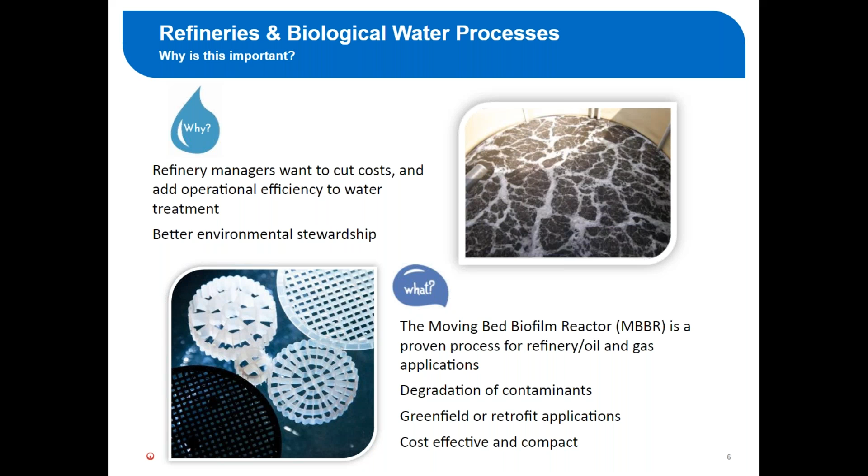Moving Bed Biofilm Reactors, so MBBR. It's a proven process for refineries and oil and gas applications. It degrades common contaminants from refineries. It can be used in greenfield or brownfield applications, and it's very cost effective and compact.

So my overview for today: I'm going to talk about biological treatment as a whole. What is it? How does it work? Then I'm going to talk specifically about the MBBR process, and then more specifically about refinery applications for the MBBR process, and finally some case studies and a conclusion.

So biological treatment, how does it work? Biological wastewater treatment uses living microorganisms to destroy or transform pollutants. So that means these little creatures use human trash, or pollutants as we would call them, contaminants, as their treasure. They use them for food, for energy, and also the energy necessary for their reproduction.

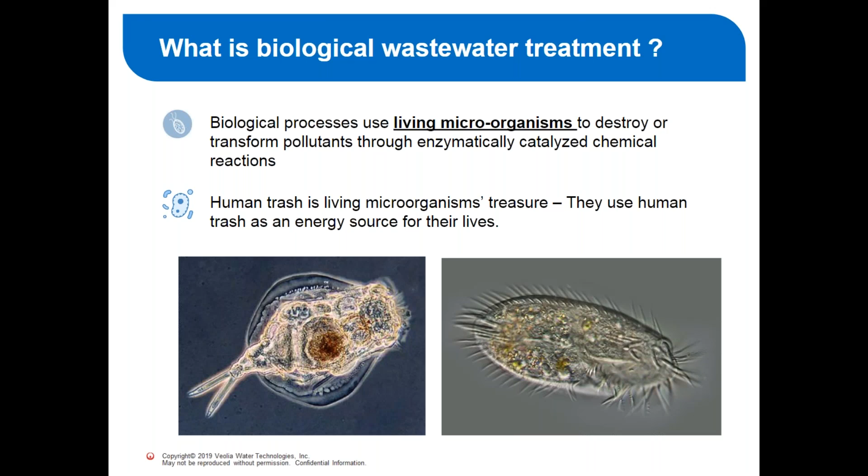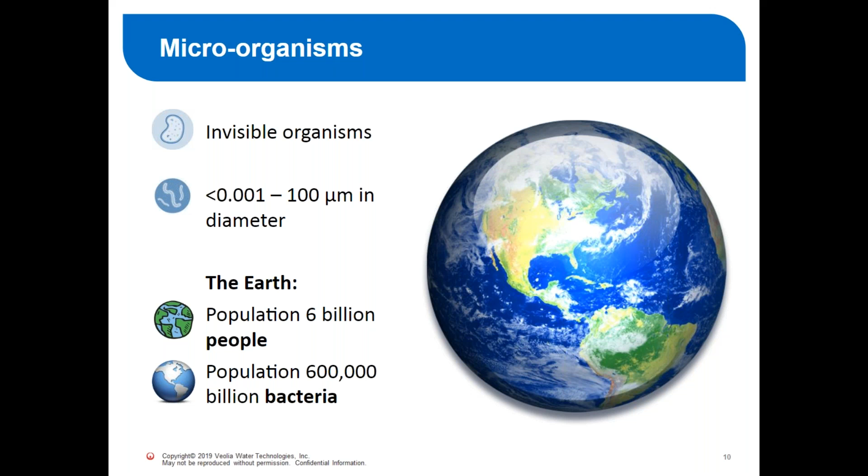Microorganisms are invisible because they're so small. You can see they're 0.001 to 100 microns in diameter. To give you an idea, bacteria have been around a lot longer than we have as a race, and they are also significantly more populous. They have about 100,000 times more population than human beings on the planet.

So why do we care? What would we use biological treatment for? One is the removal of ammonia. Ammonia is a nitrogen source that can cause eutrophication in the receiving stream or water body. Ammonia also increases chlorine demand. So for instance, if you're using chlorine to disinfect, you have to remove the ammonia before the chlorine becomes an effective disinfectant. It also increases the oxygen demand for a similar chemical process, since it has to be oxidized first. And it is also directly toxic in high concentrations.

Organic carbon and cyanide can both be toxic, and they also increase the oxygen demand. So if water with high COD, we call it organic carbon, is put into a receiving stream, it would deplete the oxygen supply, and then the fish die, and anything that needs oxygen within the stream would die.

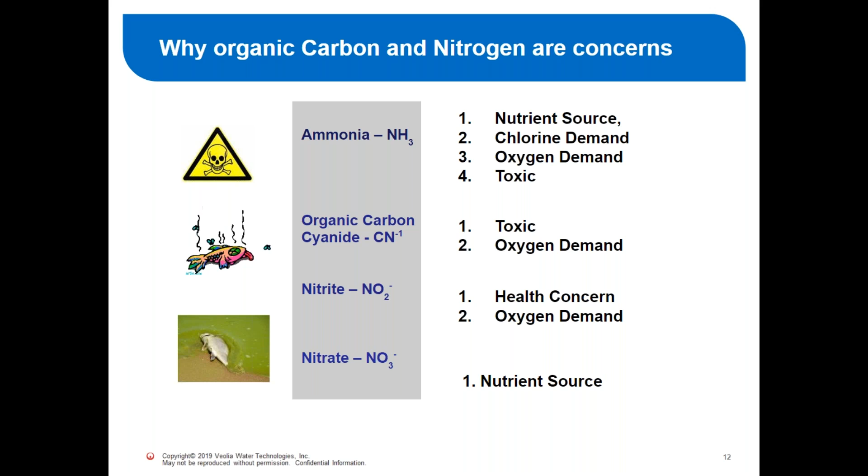Nitrite also has an oxygen demand, a little bit less than ammonia, but still there, and it is a direct health concern for fish even at relatively low concentrations. And nitrate is also a nutrient source that can cause the growth of algae in the receiving stream.

So this is a little diagram of what is kind of happening. There's a happy bacteria in the middle. From the top comes a source of organic carbon into the bacteria, and the bacteria uses it in two ways. The first way is biosynthesis, so it reproduces and has additional biomass that can be wasted, and then it respires for energy, and similar to us, produces carbon dioxide, or if it is using nitrate, it will release N2.

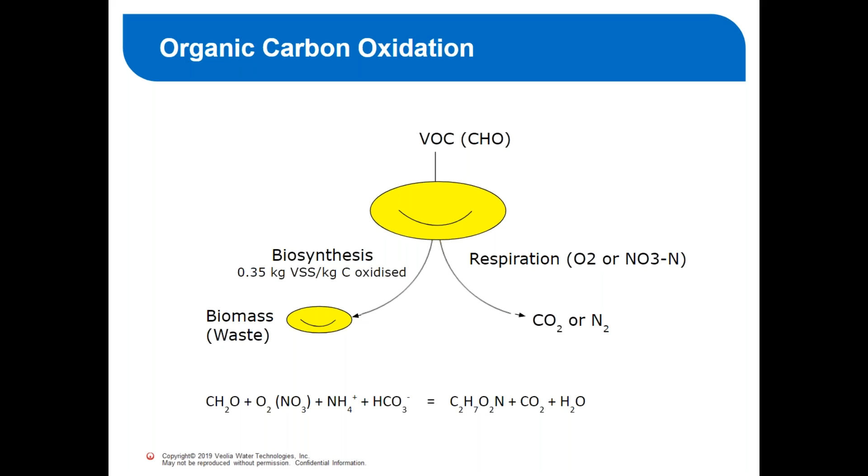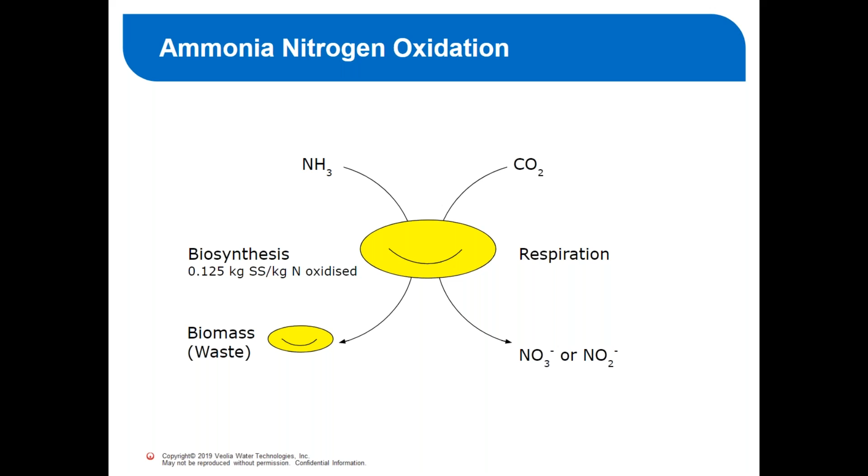For a different kind of bug that removes ammonia, it's an entirely different species, and there's a variety of species that do both of those processes. But this kind of bacteria takes up ammonia and a source of inorganic carbon, usually CO2, and it has the same needs, so to speak. It has the biosynthesis and the respiration, but because it's using ammonia as its energy source, the oxidized form of ammonia becomes NO2 or NO3, depending on which stage of nitrogen is taken up.

So this is an overview of nitrogen removal if you have an ammonia limit in your effluent, or if you're just trying to remove all of the nitrogen to lower TDS, or for another reason. The first stage is called nitrification. On the bottom left of the screen, there is ammonia, and it is oxidized first to nitrite and then finally to nitrate, which is the most oxidized state of nitrogen. This is an aerobic process, and you can see the bubbles going up in it.

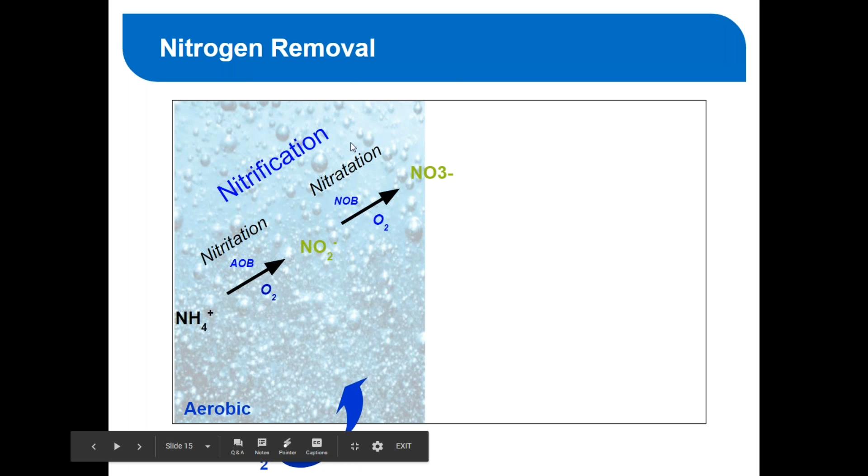And then the next step is called denitrification, where it takes the nitrate and deoxidizes it. It takes an oxygen off, so it becomes nitrite, and then finally N2 gas. The N2 gas bubbles out of the system and is removed, so there'd be no nitrogen left. This is an anoxic process, so COD is a needed food source for that step.

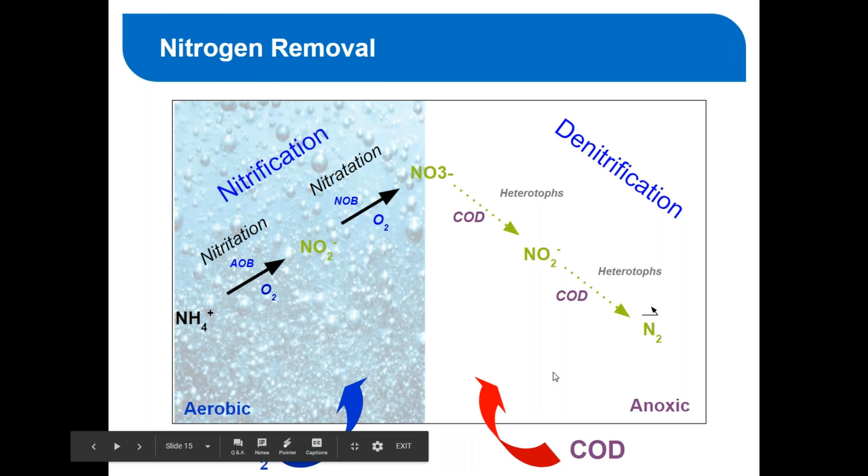So that's the biological processes, and now we'll talk about the MBBR specifically. MBBR, as I mentioned, stands for Moving Bed Biofilm Reactor. It was invented by a company called AnoxKaldnes, that Veolia acquired a number of years ago.

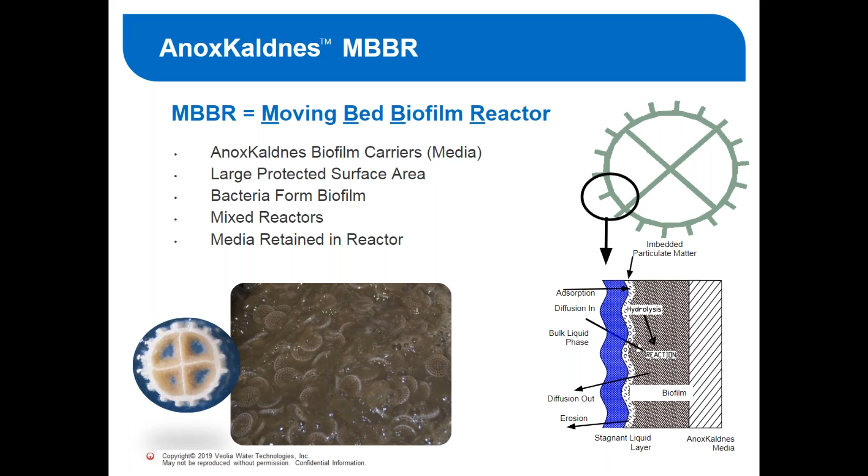It uses these pieces of what we call media, or biomedia, or carriers, as sort of stages to have biofilm form. We'll talk about what that means later. It's a mixed reactor, and the media is retained within the reactor, so it's never wasted.

So the characteristics of an MBBR: AnoxKaldnes, that Veolia acquired, was the first one, the inventor of the MBBR who started this company. He now still works for Veolia as a consultant. It biologically treats carbon, nitrate, ammonia, using the biomass on the moving carrier.

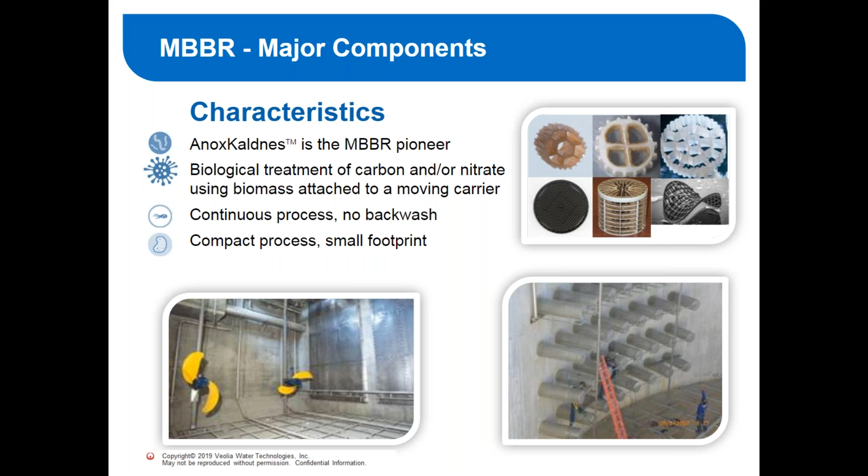It's a continuous process, just a flow-through tank. There's no backwashing, so it's pretty simple, and it's also compact with a small footprint. So it's a super simple system.

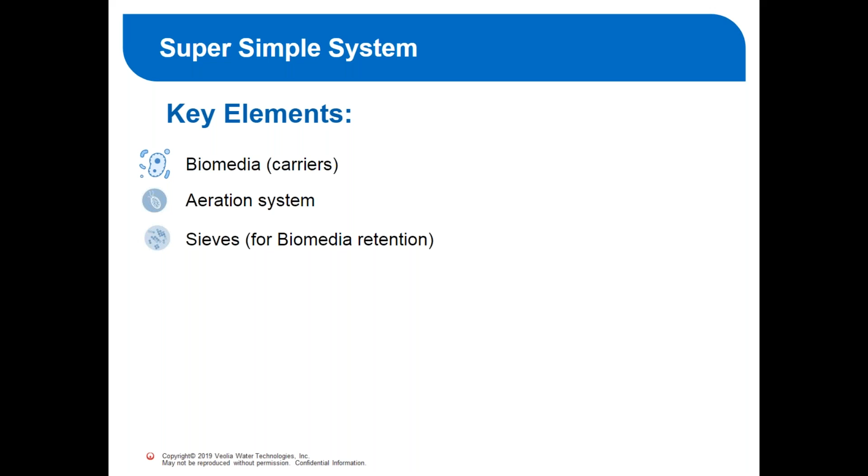There's really only three elements. The first is the biomedia, as I mentioned, or media or carriers. These are little plastic pieces that look like wagon wheels, and there are literally millions of them in the tank as stages for biofilm growth.

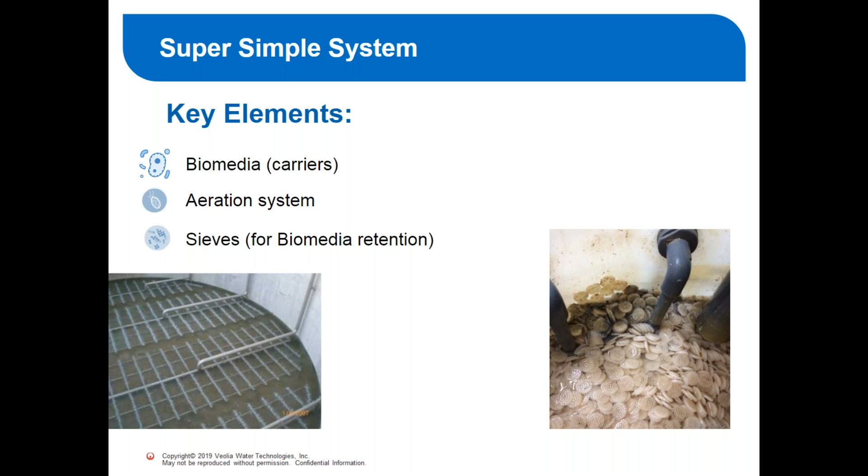There's an aeration system, or if it's an anoxic process, as in denitrification, there's a mixer. So the pieces of media have to be continuously mixed. That's why it's called a moving bed, because the bed is moving, by either of these components. If it's an aerated process, we would have aeration grids on the bottom to both provide oxygen and keep the media moving.

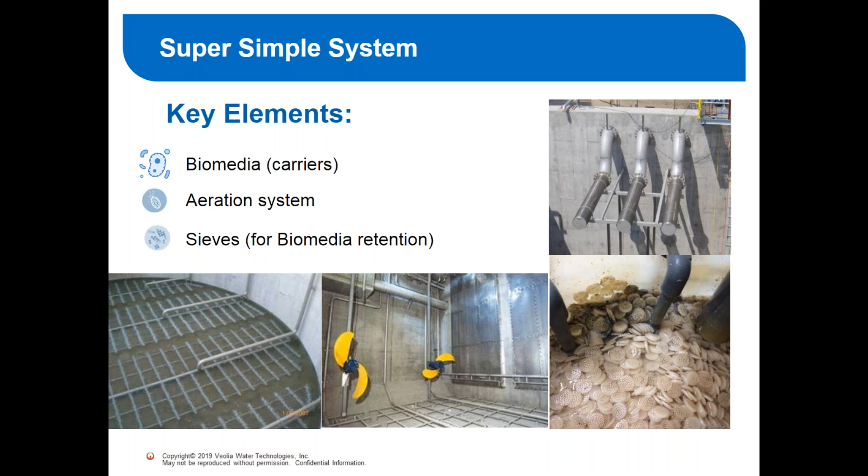And then the third component is the sieve, which is just protecting the media from escaping the tank. It's on the effluent of the reactor.

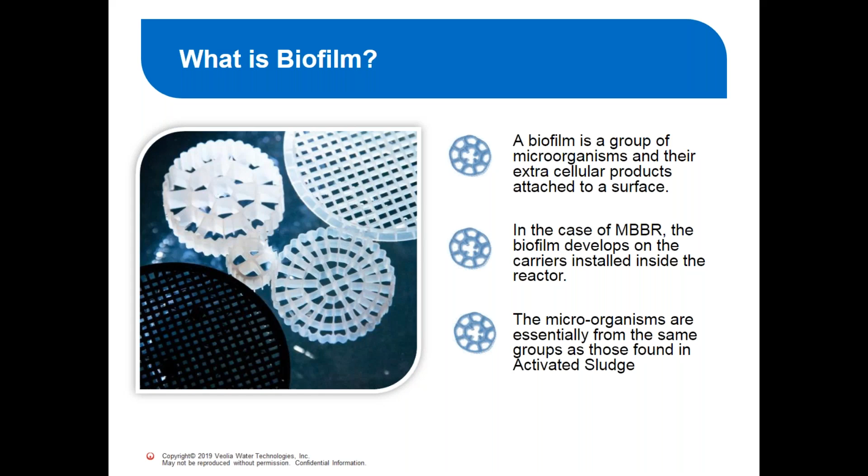So what is a biofilm? A biofilm is a group of microorganisms and their extracellular products attached to a surface. One of our experts likes to say that if you don't brush your teeth for a long time, you have a biofilm develop on your teeth. So if you're wondering, it's just sort of slimy and it can actually do some damage.

As the biofilm develops and gets thicker, they're making more biomass, and it's sticking more to the media. So the underside of the biofilm, in the thicker portions, isn't getting the oxygen and nutrients it needs. This decreases the efficiency of the treatment process because not all of the cells have access to the material they need or are able to remove the contaminants in the water.

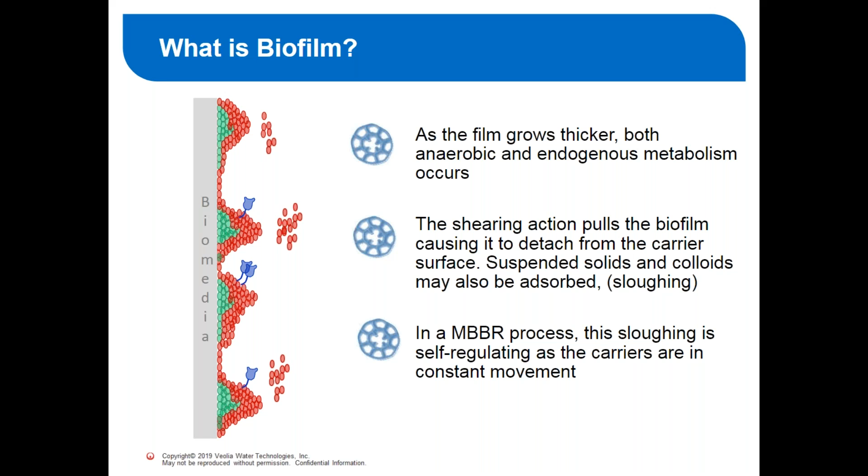But the MBBR, because the media is constantly mixed, has a sloughing action. It's self-regulating because the media is moving, so this biofilm is naturally knocked off as the pieces run into each other or into the wall and move around. The biofilm is released, which keeps it thin enough so all of the nutrients and food can get into the most active biofilm.

It can be separated into several stages. If you need to do ammonia removal or even nitrogen removal, you can have one tank be a COD removal tank, a different tank be an ammonia removal tank, and so on. It easily separates them into stages, and they don't have competing inhibitions because of competition from other kinds of bugs.

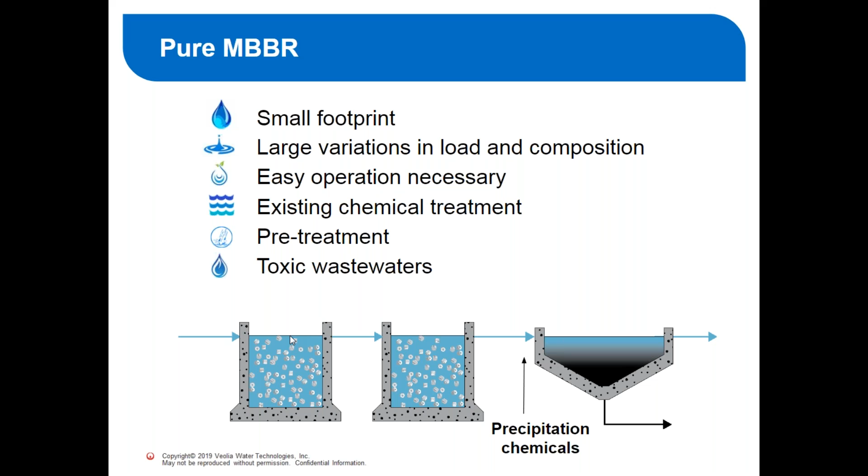So the MBBR can handle a variety of loads, or variation in loads. It's easy to operate - there's no recycle of sludge, which is very common in activated sludge systems. It can use the same chemical treatment as activated sludge, the same pre-treatment. It can be used as pre-treatment to an activated sludge system, and it can handle toxic wastewaters much better than activated sludge.

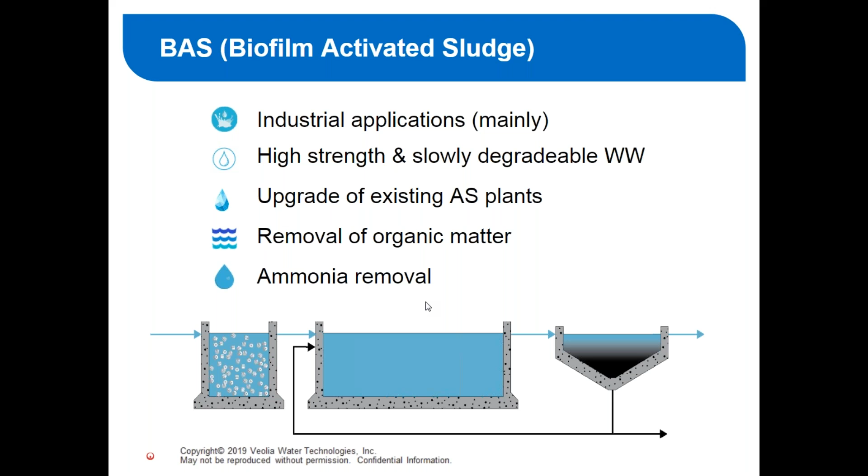So the MBBR can be put in front of the BAS system in order to upgrade an existing activated sludge system. It can be used to remove organic matter to help the activated sludge system concentrate on the ammonia removal.

There are over 1,000 MBBRs built by Veolia or AnoxKaldnes in the world. We just passed that threshold last year, and we have many in oil and gas - over 30 installations, probably about 30 installations in the oil and gas industry.

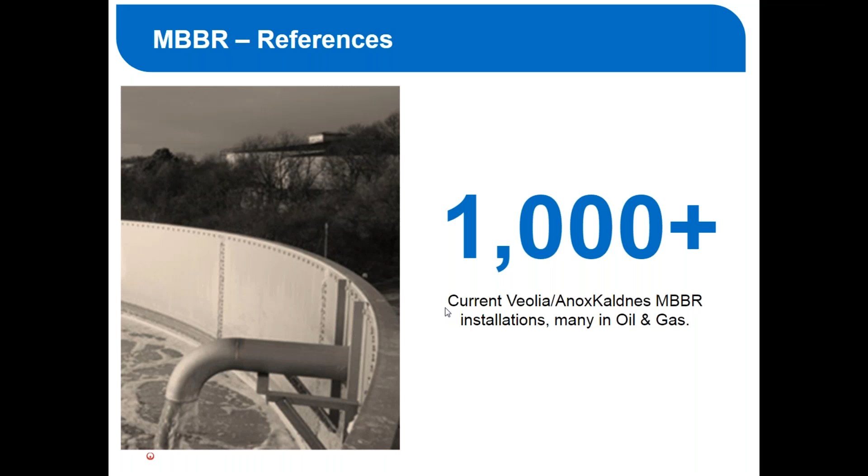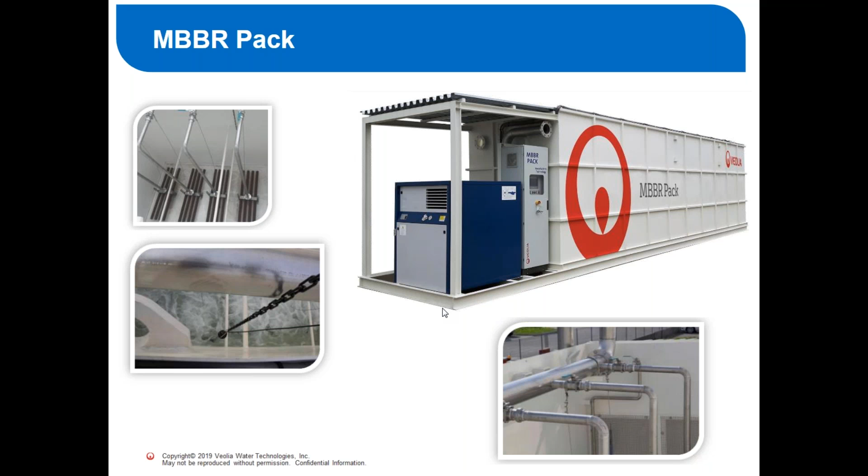So where would we put an MBBR system in a refinery? It can be put in a greenfield, just if you're building a new facility. It can retrofit an existing facility or improve its capacity.

If you need just BOD removal or BOD and nitrogen removal, biological processes can remove selenium in the forms of selenate and selenite. It can treat the POTW wastewater if you're using that as your source water, or for sanitary wastewaters, MBBR can be used as well.

It's often used before discharging to the environment to treat the wastewater of a refinery. It can also be used in reuse scenarios to increase the efficiency of that process.

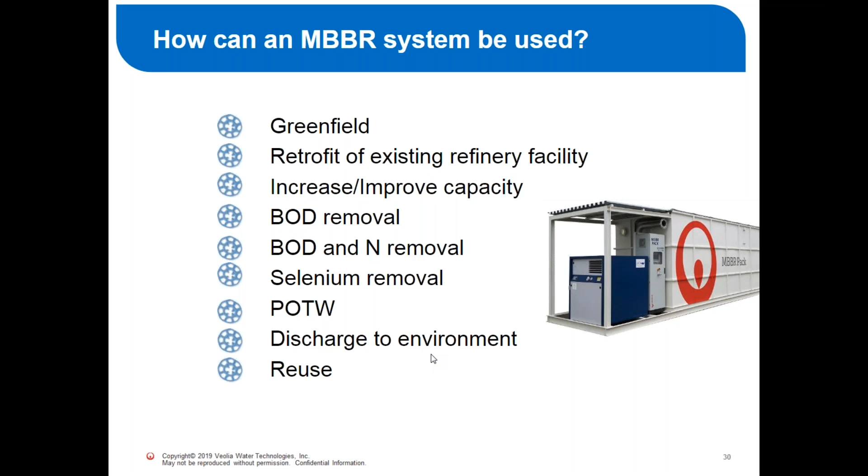Or you could make the activated sludge system what is called an IFAS, or integrated fixed film activated sludge, which means you have an activated sludge process and then you put these carriers, this biomedia, into the activated sludge process to help it remove either ammonia or more efficiently the COD.

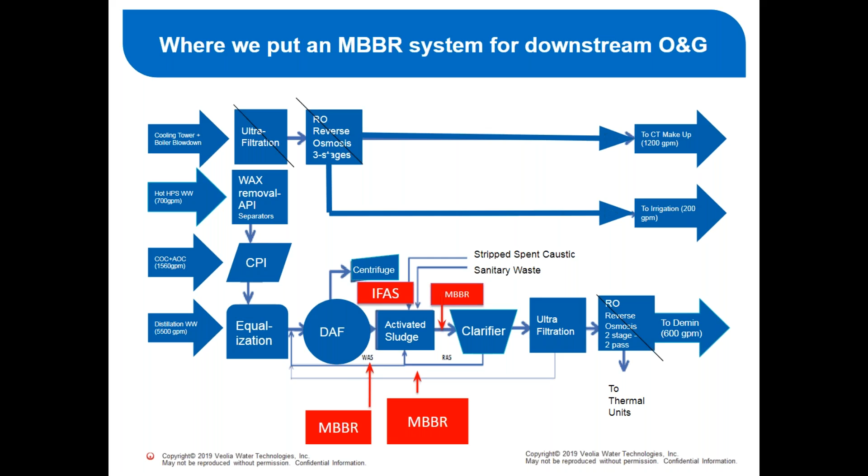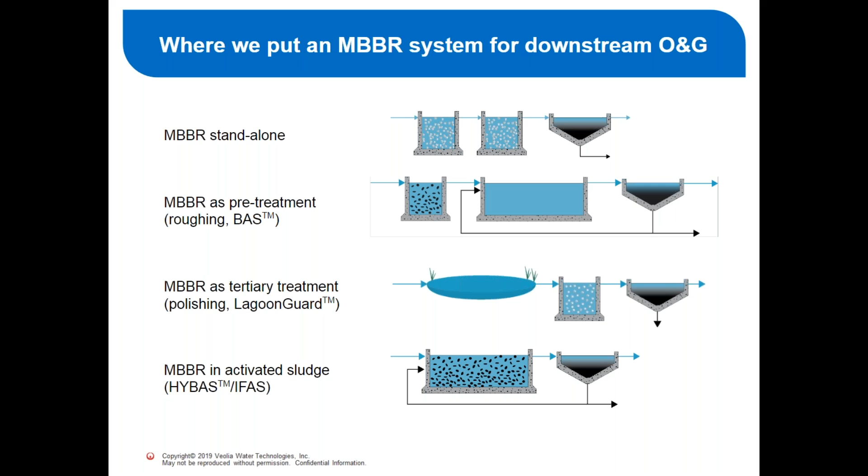So these are the different configurations for those options. The MBBR standalone, you can see as many stages as you want, each tank individually standing. Then the MBBR is sort of a pre-treatment to the activated sludge, a tertiary treatment to a lagoon, or MBBR in the activated sludge system for an IFAS.

So what are the key benefits for refineries? Probably the most attractive one is the low capex and opex for an MBBR. There's no solids recirculation with wasting, so that saves a lot of trouble for the operators especially, and it also improves the settling characteristics, which makes it just easier to operate.

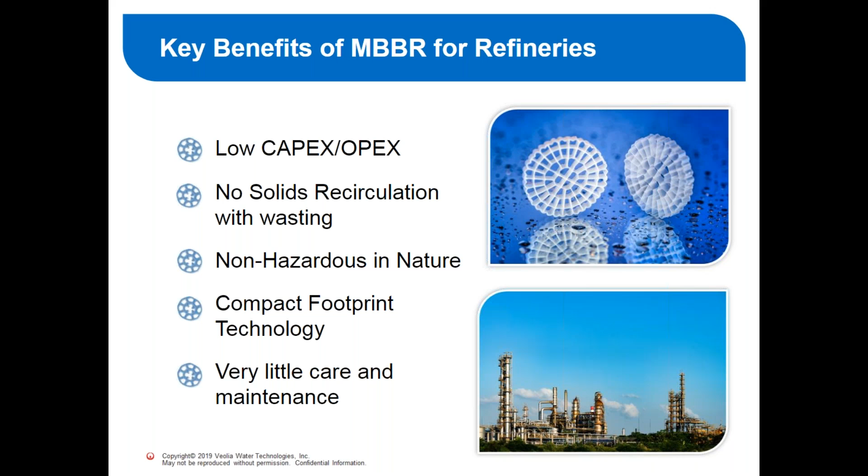It's non-hazardous in nature. We're basically just putting into a tank what the environment would have to do, so the environment doesn't have to do it. It's a compact footprint, and as I said, it's very easy to operate, so it needs little care and maintenance.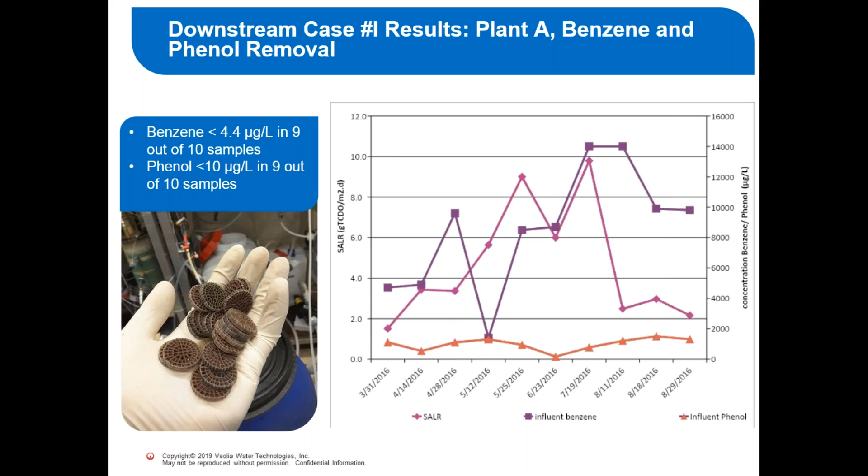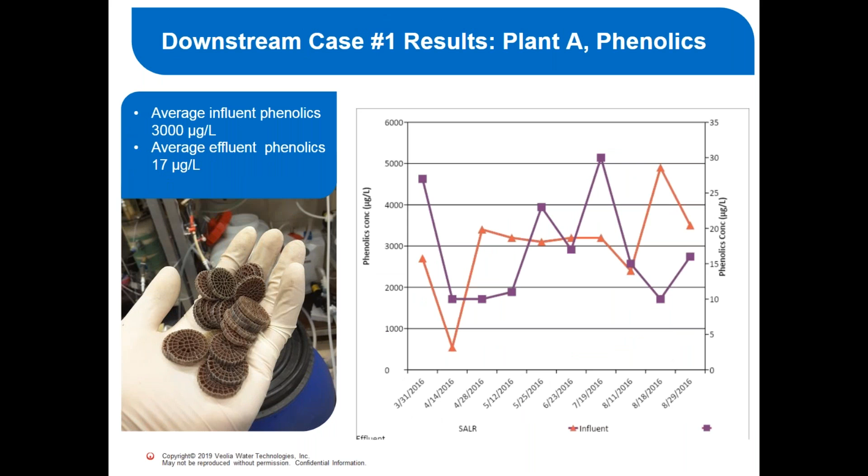The effluent phenols is on the right there, the scale is on the right, and the influent scale is on the left. I think the numbers are, this is a little bit easier to see. So the COD scale is on the left there, and the feed, as you can see, it's around 1,000, between 800 and 1,000. And then at the bottom, the R2 is the effluent of the MBBRs.

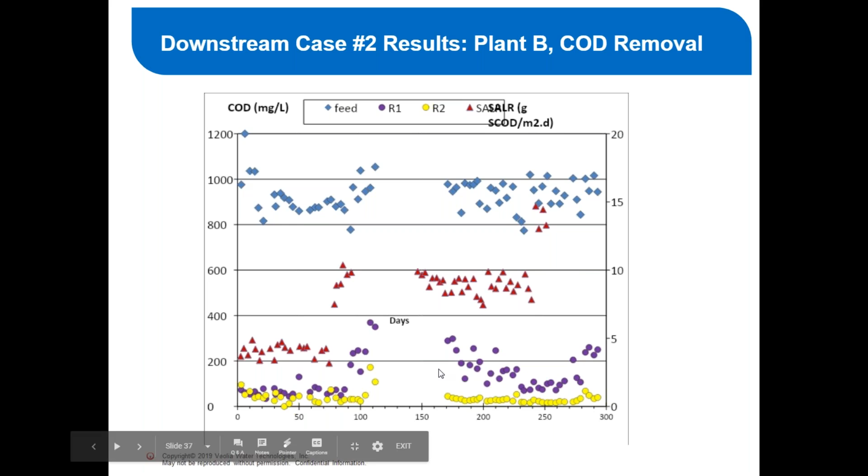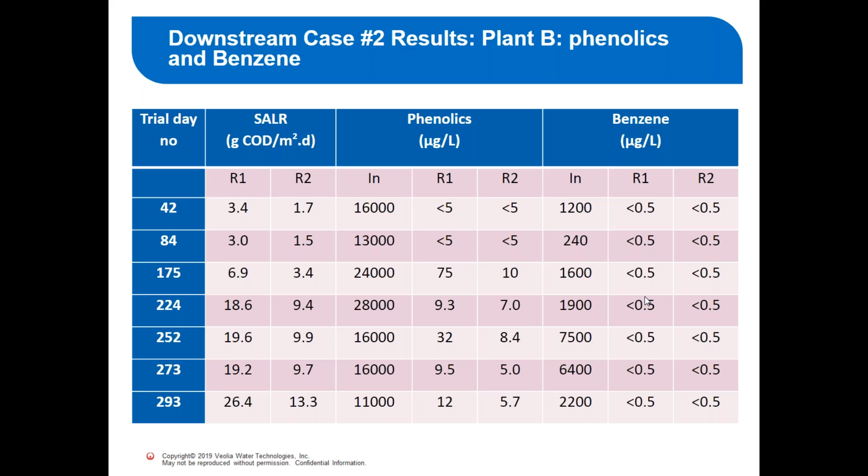So here's the results of that study: the phenols were always below 14 micrograms per liter, and the benzene was always non-detect in our studies. So we can say that yes, MBBRs do successfully remove phenols and benzene.

So this is a Borger refinery, a long-term project for us, or rather, it's a project that has been installed for a long time. The plant was upgraded in 1999, about 20 years ago, to improve the COD removal efficiency across its already existing activated sludge. They needed to start nitrifying and removing ammonia, and they were also having a large variation in load, and the activated sludge system wasn't responding as they needed it to.

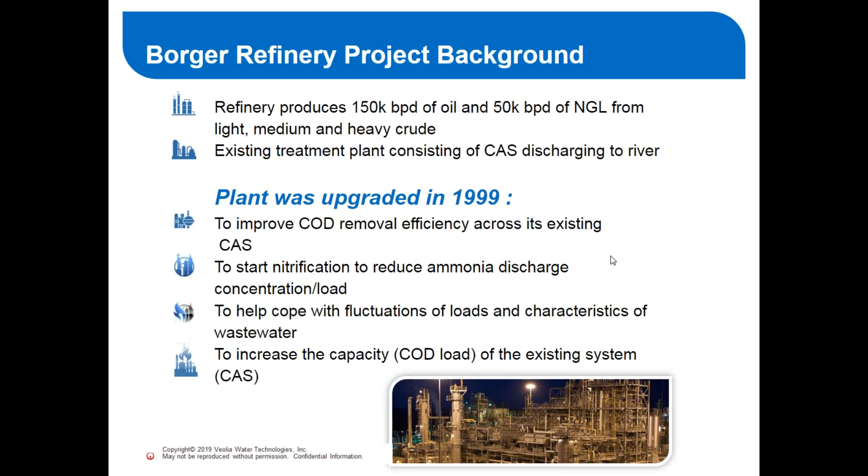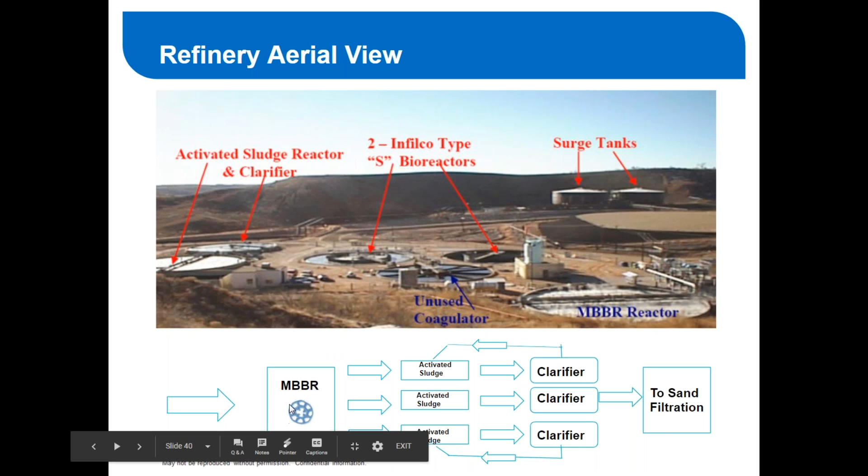So this is an aerial view before Google Maps existed, if you can remember that time. The clarifiers here on the left were the existing ones in the activated sludge system, and there's one large MBBR reactor that is feeding 3 activated sludge systems. And yeah, they were very happy with our design.

So the design flow was 20,000 meters cubed per day. In America, no one knows what that means - it's about 5.2 mgd or 3,700 GPM. And you can see the BOD and COD loads there.

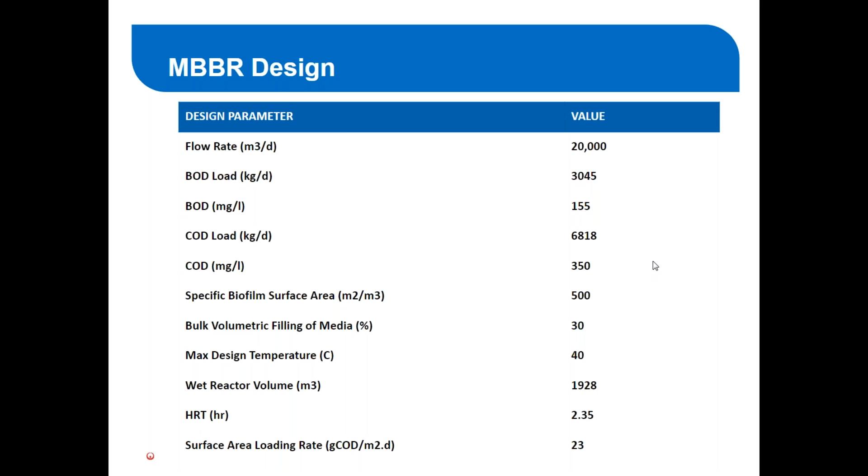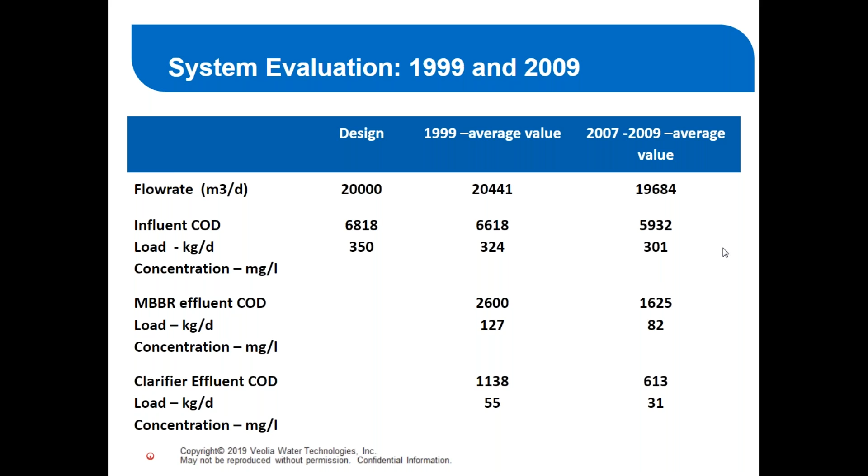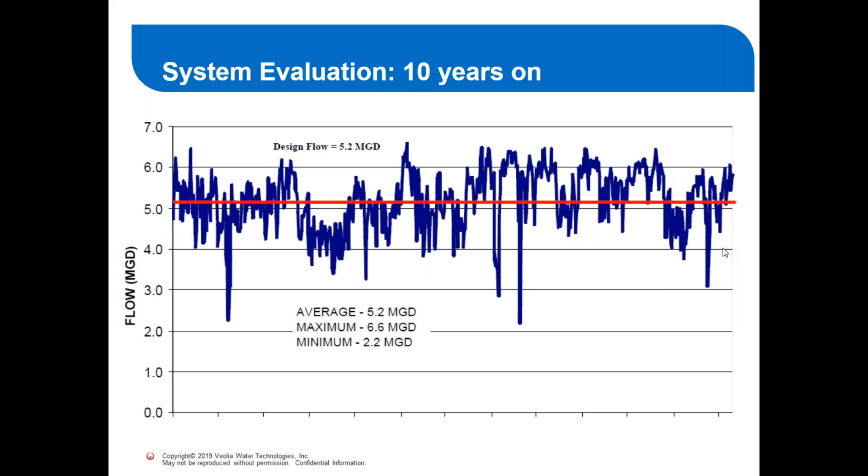So we did an evaluation after 10 years of performance, how would it do? Now it's 2019, we're due for another study, but you can see that the load did vary throughout the 10 years, but the effluent concentration continued to be quite good. So this is a slide to show the variability of flow. The maximum flow is more than 20% higher than the design flow, which might be a problem for other systems, but the MBBR continued performing quite well.

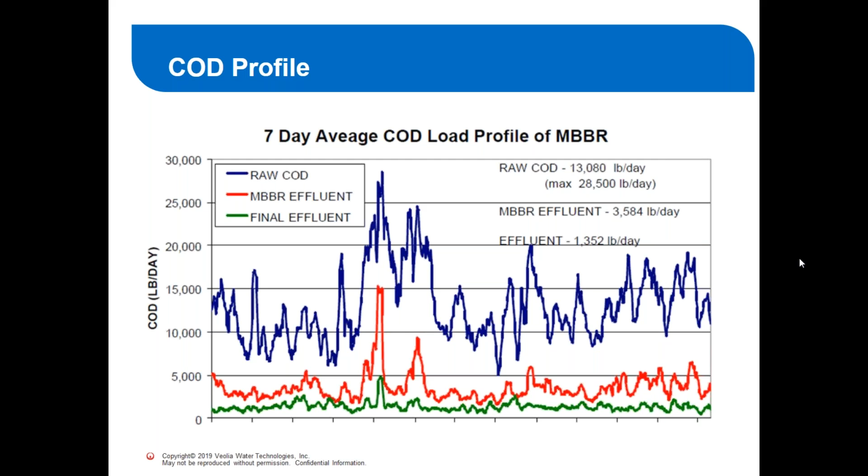And this is showing that the MBBR took off the vast majority of the COD load. That red line is the MBBR, and the activated sludge effluent is the green line. So the MBBR would take the initial shock of the highest, easiest to degrade COD load, and then the activated sludge would polish it off, whatever took a longer time to degrade.

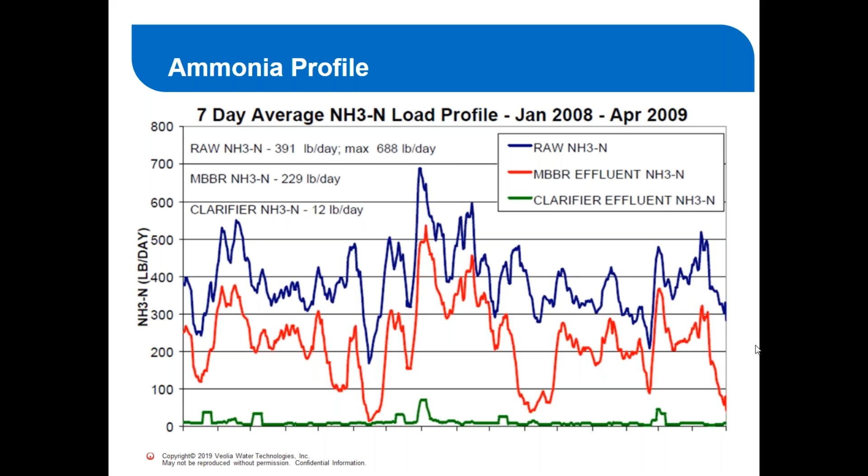You can also tell that the activated sludge was doing the nitrification while the MBBR was taking out the COD, because you can see that some ammonia is removed in the first stage reactor, probably through assimilation processes, whereas the activated sludge system took off the ammonia. So this was a very successful BAS process.

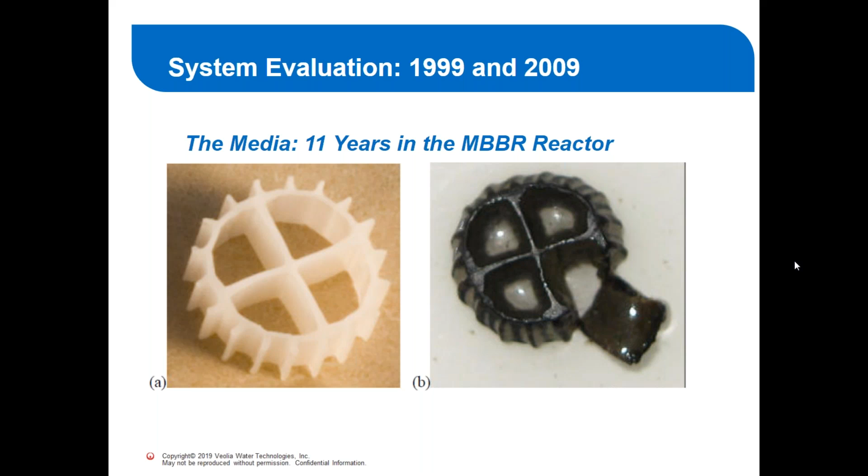So this is a picture of the media. This is K1 media, which is sort of the first one Anox Kaldnes came up with. We're now on K5, and it has more surface area. The new pieces of media have more surface area than these ones do, but the K1 is extremely robust. That piece is broken just for the sake of the photo. Despite the fact that they are covered in oil from the refinery wastewater, they are still working very efficiently.

So the conclusion we can draw is that MBBRs can be operated more than 10 years, and now more than 20 years, without making changes to the aeration grid, media, or sieves. This is very good news for the owners - the performance didn't deteriorate, it actually improved.

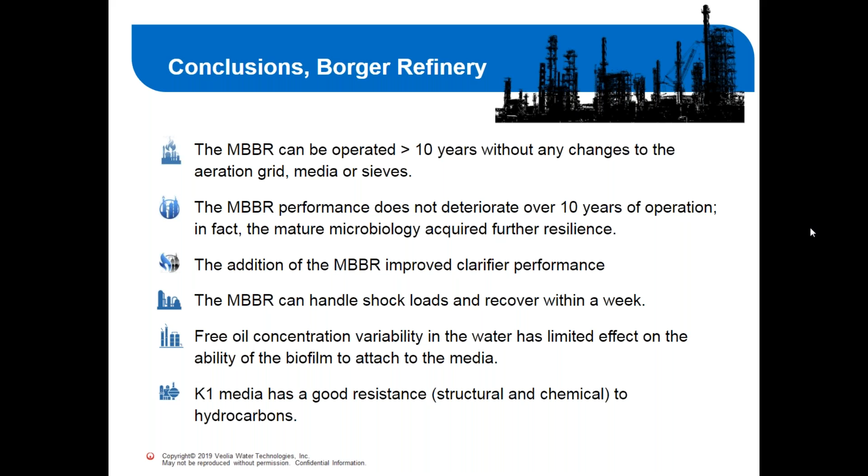Adding an MBBR improved the sludge settling, so the clarifier performance improved, and then it could handle a shock load and recover within a week. So this was a nice project for us.

So some key takeaways: the MBBR is a proven process for refinery and oil and gas applications. It efficiently removes COD, ammonia, and nitrate. It can also remove trace contaminants such as total selenium, benzene, and phenol down to microgram per liter levels. There can be different configurations to meet local needs. It's very simple to operate - there's no clarifier or sludge recycle to manage, and it provides a compact and cost-effective solution.

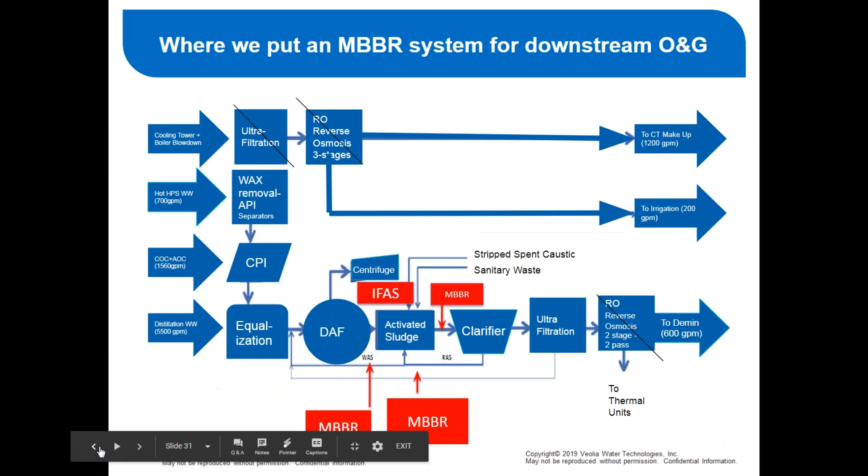How much smaller will an MBBR be when compared to a conventional aerobic reactor? A conventional aerobic reactor is what I've been referring to as activated sludge - that is an aerated reactor, and I had a slide much earlier making a comparison that we did. It will vary based on local needs, temperature, and things of that nature.

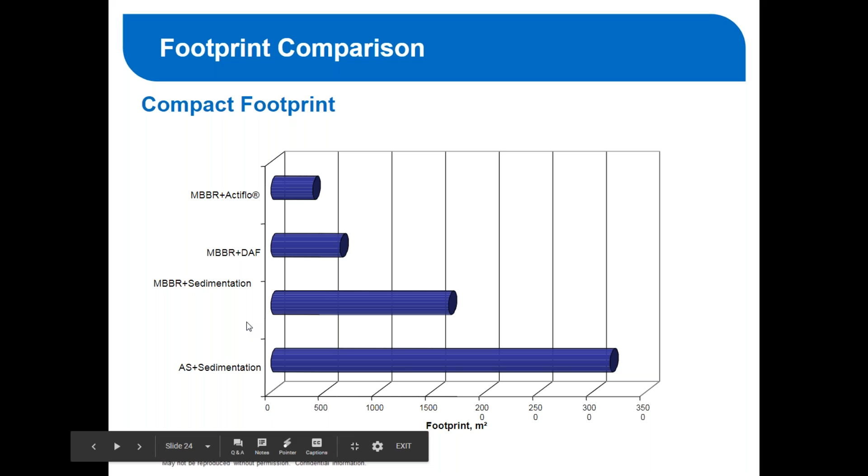So the lifetime of the biomedia - we have an installation that's been in an anoxic basin started about 30 years ago, and that media has not had to be replaced yet. So at least 30 years. It doesn't degrade over time. It's plastic, made from virgin HDPE, so it hasn't degraded that we've seen yet.

So there's a question: what is the typical MLSS in an MBBR? This is actually a question for an activated sludge system. An activated sludge system is based on what is called MLSS, the amount of biomass within the reactor. But because our biomass is on the media, we don't really speak of MLSS - we speak of meters cubed of media, or meters squared of surface area that we have. So we don't really have a typical MLSS, because we have a typical surface area loading rate for the application.

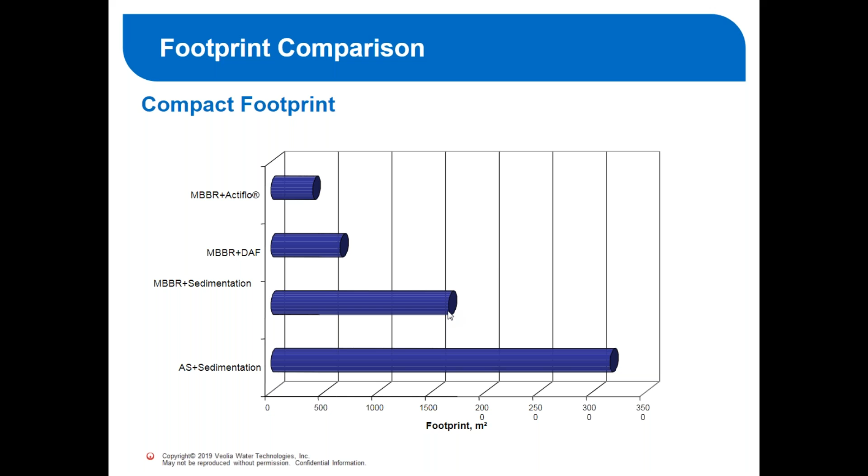So for MBBR applications, what are the limits on oil and grease and TSS in the influent wastewater? That's a great question. For TSS, it can handle extremely high loads - we've handled up to 1,000 in my knowledge, but I'm not sure if we've handled higher than that. TSS is inert because, as I mentioned, it just passes through the system since there's no filter. The stipulation we make is that it has to be small enough to get through the sieve so it's not retained in the reactor, but that usually isn't a problem because the sieves have pretty big openings. The oil and grease, however, we do have a limit on that - I believe it's like 80 ppm of free oil that it can handle, but I can get back to you on that one to be exactly sure.

So regarding the effluent sieves - how do we design for varying flows? Is there a potential problem with biogrowth on the sieves that would impede flow and cause water level fluctuations in the MBBR tank? This is a good question as well. So the effluent sieves are designed for the peak, usually plus a safety factor flow rate. We know how much water can get through the perforated holes, and we design for what would be the max hydraulically to put through the tank. Is there a potential problem with biogrowth? I can see why you would think that. However, the media is like a natural scouring agent because it's constantly rubbing up against the sieve. So it's constantly scouring the sieve, and then also we have an air scour, sometimes dedicated to the sieve, and sometimes just having air on the bottom of the reactor close enough so that the sieve is continuously scoured so that biogrowth doesn't develop and clog those holes.